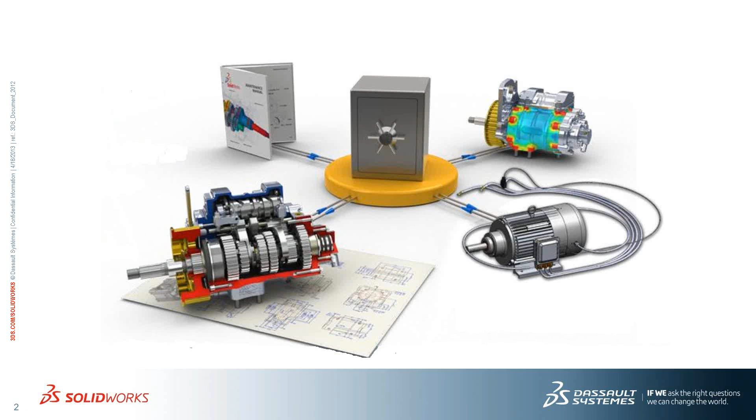So as with all the other products that SolidWorks provides, it's kind of all in that grouping, from simulation to composer to the design tool. Electrical fits right in there. And when I say it fits right in there, it will work right inside of SolidWorks. We can manage the data inside of Enterprise PDM, so it's one of those pieces we can plug in and work directly with, just like all the other SolidWorks tools.

Now, what I want to cover today, I'm going to keep it light on the PowerPoint, but I do want to set things up as to where the electrical 3D product fits. I'll talk a little bit about the typical electrical mechanical process, issues with that process, maybe a new process proposal, and then we'll look at the products and actually run Electrical 3D and show you what that might look like. So here's what we're seeing today.

Very typical: the 2D electrical user creates the schematics, the line diagrams, the work they need in 2D electrical. The mechanical designer does the layout of the mechanical side of things. Then, as mentioned before, there's some integration meeting or communication that allows you to take the two pieces and put them together, but it happens late in the process. Then you have to document everything for manufacturing. It's a very serial process.

One thing waits on the other, or maybe not. Sometimes mechanical design gets ahead of electrical design, sometimes electrical gets ahead of mechanical. We'll talk about that as we go through this today.

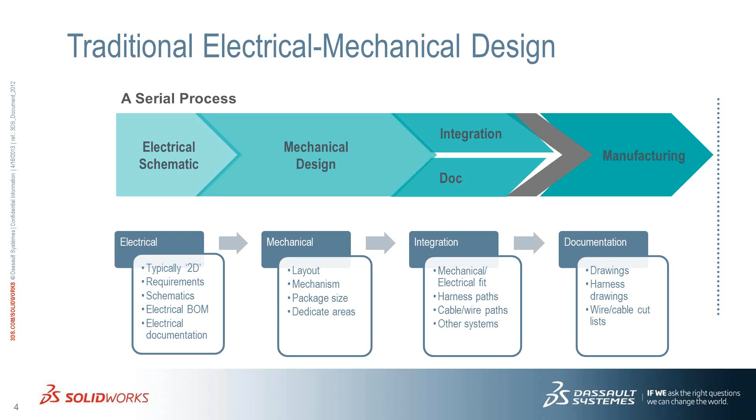Now what are some of the issues with that? First, you have a separate bill of materials typically for mechanical and electrical designs. So if you're looking at full cost estimation of your product, there's more work to work up everything there. When we talk about the design collaboration that exists between the two, it's meetings, it's conversations, it's passing a drawing. There's really no true collaboration currently, unless you've gotten really unique in your process.

The integration of the two systems, as I mentioned in that serial process, is typically an afterthought. You don't plan the paths for routing electrical as efficiently as you wanted to. So sometimes when you start to put equipment together, you have to reroute things or wire it a different way because you don't plan for the electrical side. And it's hard when you've got many phases like electrical, hydraulics, and pneumatics, and the different individuals who work on those, getting them all coordinated together.

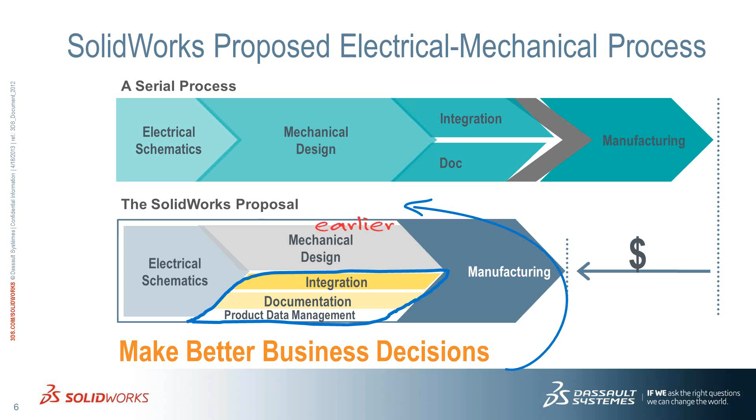So what we're proposing with electrical and electrical 3D is to take that process and start to integrate your electrical design into your mechanical design much earlier in the process. Document it, manage it, and integrate it all in one shot, cutting back the time you need to complete your designs.

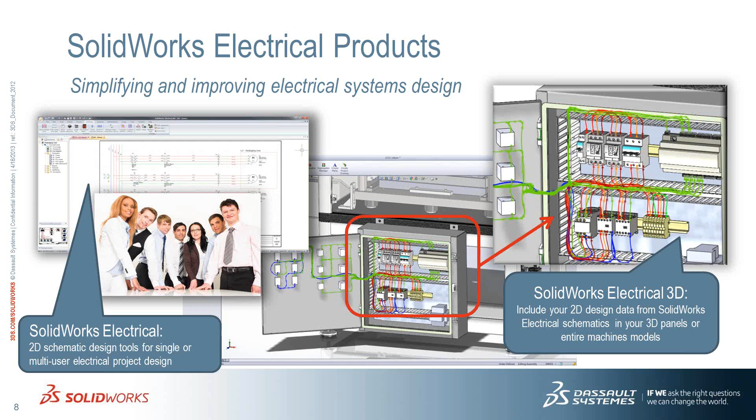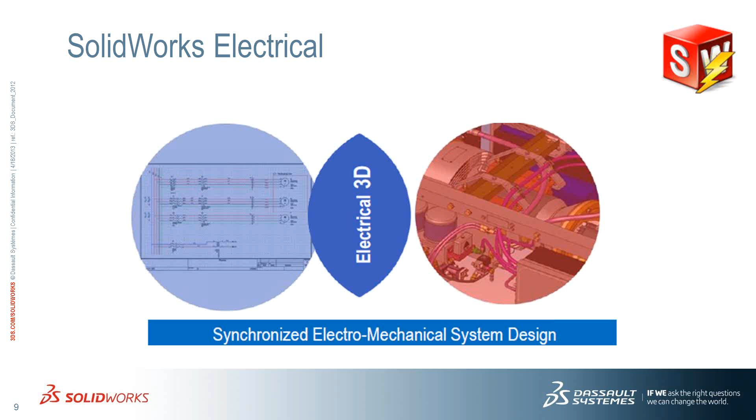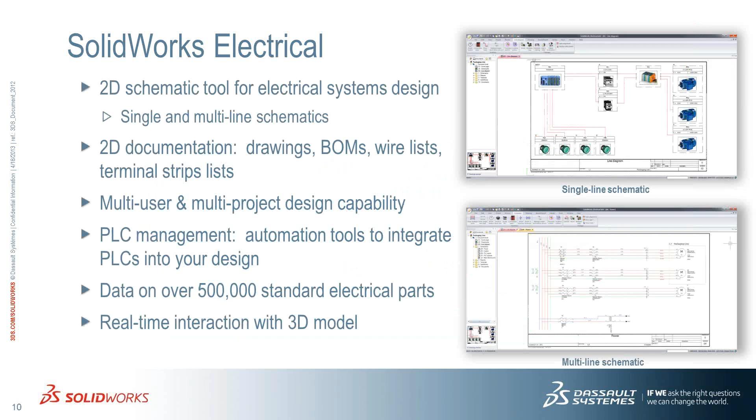So when we deal with electrical products, hopefully you saw this morning the 2D electrical, and we have the 3D electrical product. Now I'm going to focus on 3D electrical. Kind of visualize it this way: it's that piece that bridges the gap between the 2D electrical and the 3D mechanical. It's that synchronized system design. Now, if you didn't attend this morning's SolidWorks Electrical 2D session, that tool is intended for the 2D schematic, line diagrams, panel layouts. With 3D electrical, here's some of the things we can look to get.

First of all, we're going to leverage the schematic that the electrical team has already put a lot of time and effort into. We're going to keep an eye on that electrical design - if things change, if components get added, we're going to know about it. Now we can virtually plan all our paths and routes, and we can avoid issues with other subsystems.

What this helps you to do is create more consistent product assembly documentation and manufacturing later on down the road. You know what the length of the wire is going to be, you know what it's going to look like, and you know where it's going to be routed. Another big aspect is having a unified bill of material, getting those costs associated with understanding the electrical and mechanical components, and then organizing it later on for simulation.

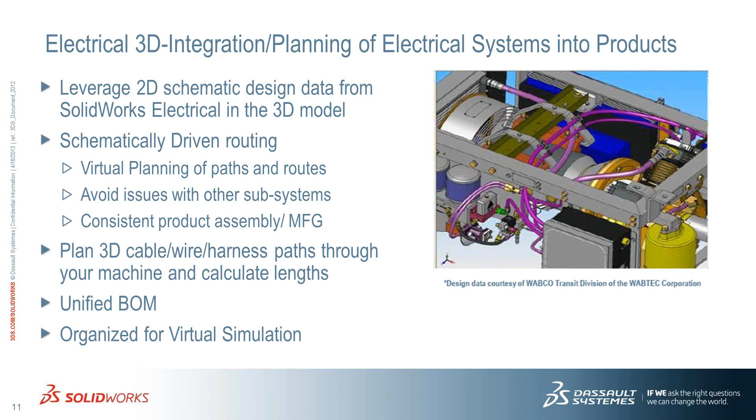Think of the other things you do like flow simulation, mechanical simulation, and understanding what other areas inside the mechanism have wires and harnesses within those. Think of it another way: think of the electrical components that we add to our SolidWorks assemblies. That's what we're focusing on today.

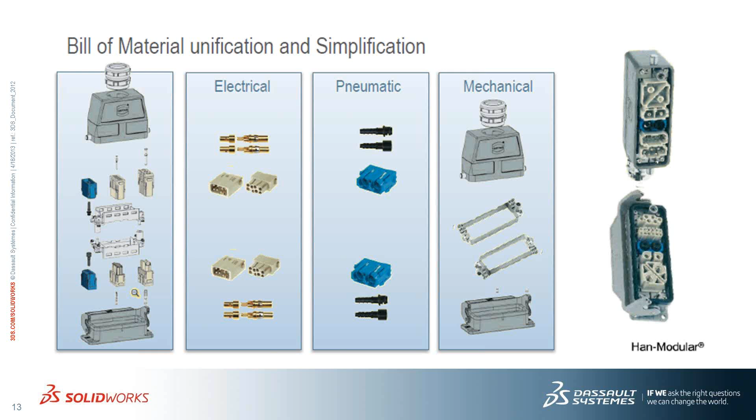When I talk about bill of material unification, this is a good image that helps us understand that. A lot of times today when we're doing mechanical design, we leave out some of the electrical components or we leave out some of the pneumatics. In this case, we allow us to take advantage of what's been done in the 2D to put all of that together into our assembly so we have a full bill of material. Okay, so let's take a look at the product.

Electrical 3D is just one aspect of SolidWorks Electrical. The other is the 2D. The neat thing about this is it's all connected in a collaborative environment.

There's actually a server where the 2D electrical user and the 3D electrical user connect to, so it's real time. On the mechanical side, you're going to start to work with existing projects that your electrical designers have started. Here you can see I have multiple projects available to me, and I can choose to open those projects directly inside of SolidWorks.

SolidWorks Electrical 3D is just another add-on. When you turn it on, you have toolbars, and another tab over on your task pane for the project documents.

What you're seeing is a folder or book layout for an existing electrical project that includes cover pages, drawing lists, and some other things unique to a project, such as adding other PDFs or other documentation that you might need.

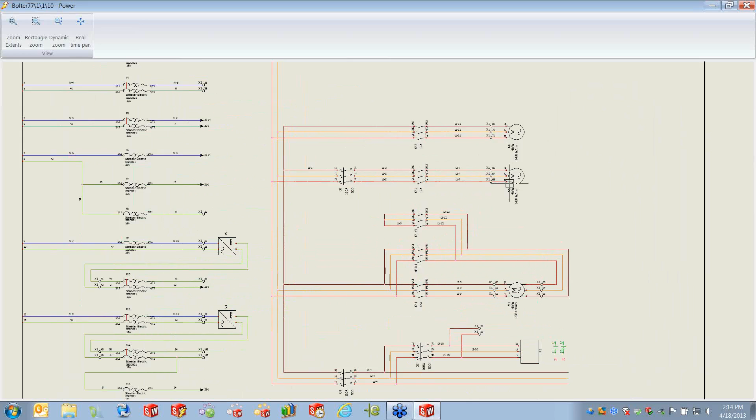What's neat about this is I have the ability as a mechanical designer to go in and look at the 2D electrical design, the most current design. This is really just an image, I can't change it, but I'm able to see the motor starter circuit we're looking at for this particular design, and I have access to that.

Now what you're seeing is just how it was organized. On top of that, we have our SolidWorks files associated with this, because not only are we wiring up a panel, but we're also managing the SolidWorks file associated with that. That's also stored within the project, and I can go ahead and open that automatically from here as well.

A couple things you'll notice now: our CommandManager has electrical 3D options associated with it. Next to my DisplayManager, we have something called the Electrical Manager, which manages all the components as part of the electrical design, and I'm going to come back to that in just a moment.

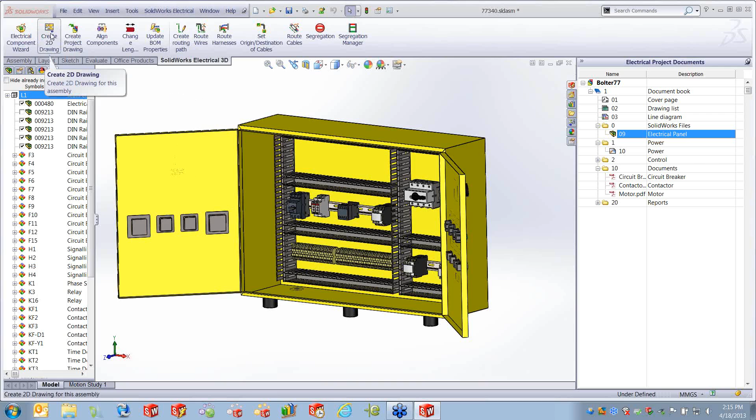As we go through this process, let's look at some of the typical things we do inside SolidWorks. First, we create 2D drawings. I'm going to let the software create a 2D drawing of my unfinished panel. This panel's been started using the schematic tools that are available. We'll go ahead and start our SolidWorks drawing.

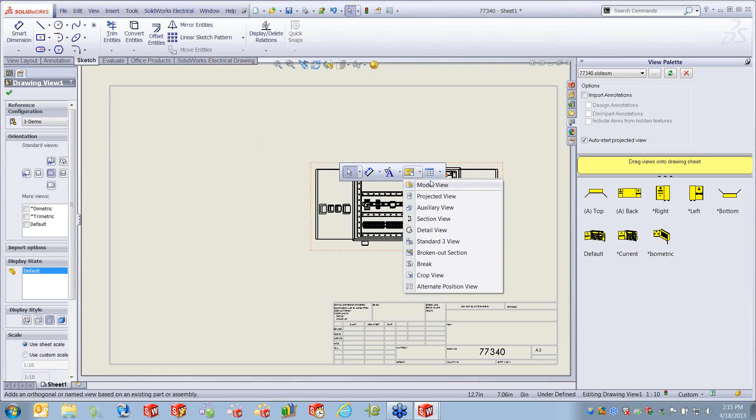This is stuff that we're all used to at this point. We'll go ahead and maybe add a bill of materials to this, and we'll balloon it because we want to see the process of getting this up to date. We'll go ahead and auto balloon, and everything's coming in just nicely.

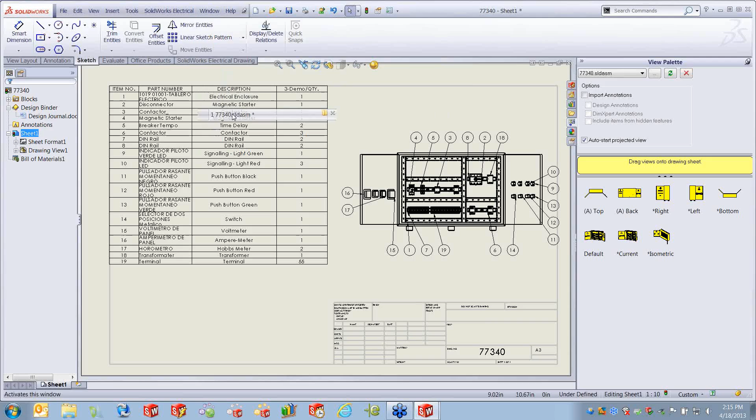Now, as I go back to the assembly and continue my design work, when we talk about collaboration, we really have to understand what's been done since our last change or last edit to this assembly.

In order to collaborate with the electrical group, we have the Electrical Manager off to the left-hand side. This is a list of all the electrical components that have been added in 2D electrical. If I expand any of these components, you can see the type of component it is and whether it has been added to my SolidWorks assembly. If there's no checkbox, it has not been added.

I also have a nice little tool to hide any components that have already been inserted. You'll notice that I'm missing a DIN rail here. I can tell the software I'm ready to insert that horizontal DIN rail, and place it into my assembly. It automatically brings up some of the mating tools we have in SolidWorks, but here's where it starts to get unique to an electrical experience.

I have the ability to modify the length of that rail on the fly. If I wanted to make it a little shorter or longer, I could do that automatically. Now there's a couple other components we need to add here. I need this magnetic starter.

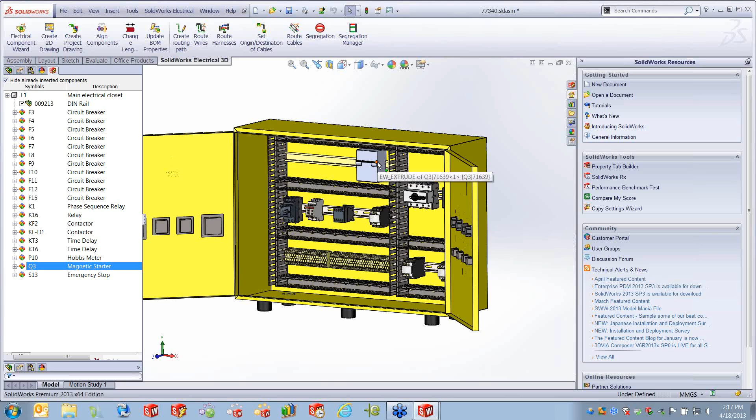In some cases the software, as it did with the DIN rail, knows exactly which component to get out of my library. We're going to talk about later how we might affect that. As I right-click on a component that hasn't been added, I can drop that into my assembly. The one thing I want you to notice is that the component automatically snapped itself to the DIN rail.

Okay? So here's the process of us taking a look and seeing what the 2D electrical designer has already done and adding those components to my electrical assembly.

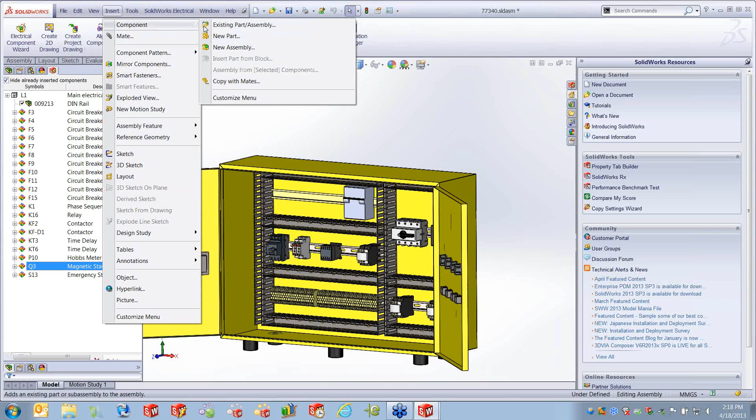But that's not always how it works. Sometimes your mechanical group gets ahead of the electrical group. In other words, you'll add motors, you'll add light curtains, you'll add switches, you'll add things to your assembly that have yet to be wired within the system. Well, that's very easy. I can go ahead and insert components like I typically do. We can browse to what we want to add.

In this case, we're going to add an emergency switch. We place it into the assembly the same way we do any other component in SolidWorks. There's nothing new there. I can go ahead and position that component within the assembly and orient it properly.

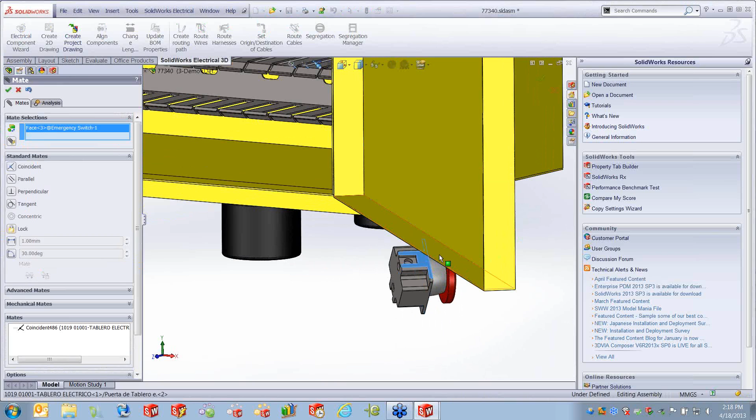Once I have it oriented, this is where the communication process comes into play, because I have yet to let the electrical group know that I've added a new component that needs to be wired up. So what I can do on the mechanical side, very simply, is to add that component. Now, adding a component is your way of communicating back with the electrical group.

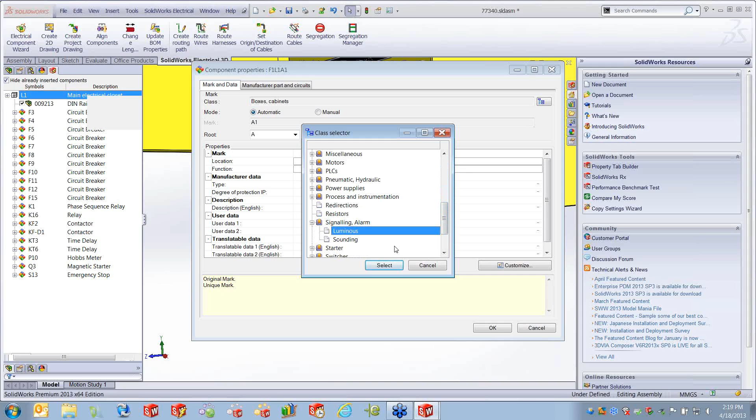Within electrical, we have a library of components. Those components contain some of the 2D electrical symbols that will be used for the 2D users, but it also contains some tools and items that we can utilize on the 3D side. Everything is organized by class, so I can go ahead in this case and select the class of component that I want to add. This is a signaling alarm, a luminous signaling alarm. I can go ahead and select that.

If I happen to know the next mark that we're going to use, I can put this in here, but this is something that can be edited on the other end. And we can also put in things like descriptions, so we can make sure on the other end they can have an idea of what we're dealing with or what we've added.

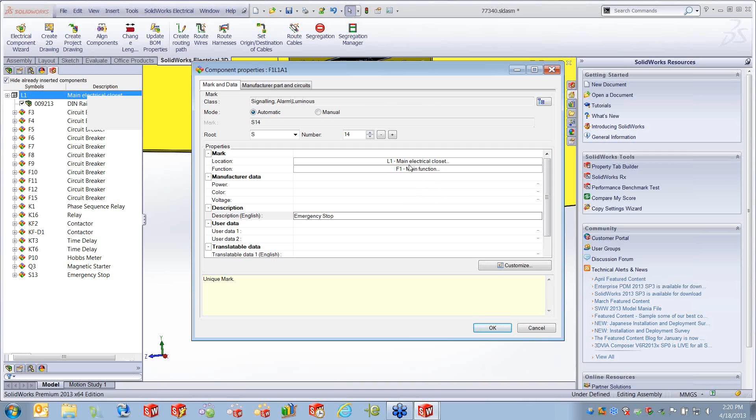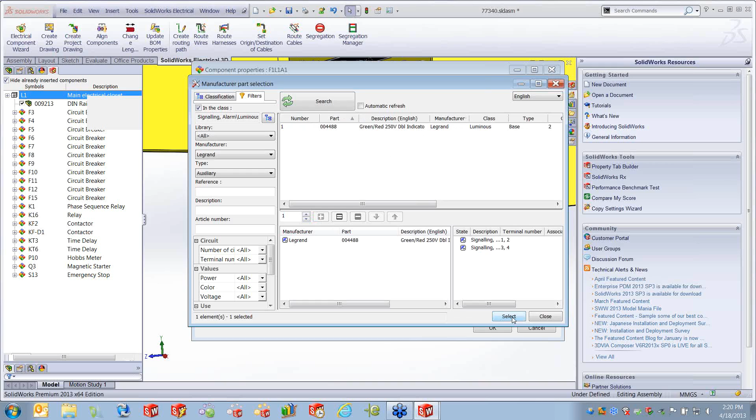Now, on top of that, we can also tie in an actual manufacturer of the part that we're going to add in this case. So we have the ability to search an existing database for different manufacturers of these types of components. If I happen to know the reference number, I could go ahead and type that in and physically search the database, and here I have an emergency stop indicator from Legrand that I can go ahead and add to the system as well. Okay, and this just tells the electrical designer what we're actually using as a manufacturer, so they can do any research that they need to do along the way.

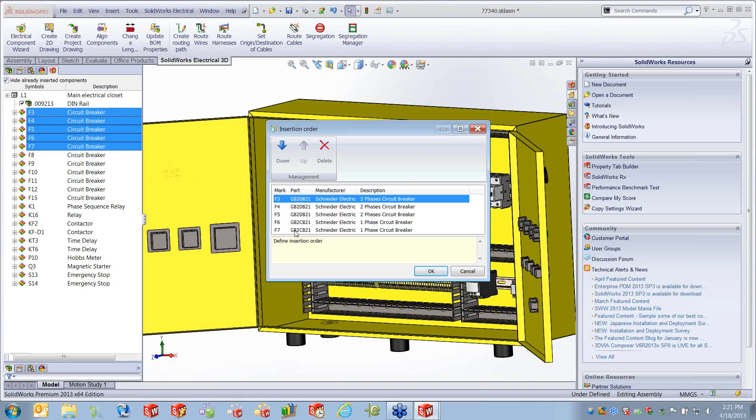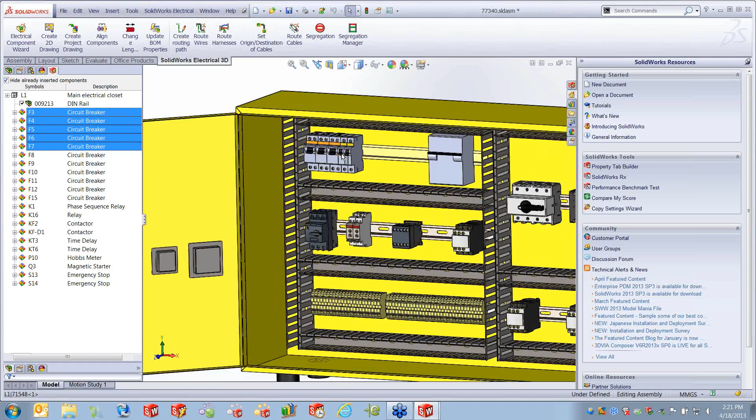Now, I have some other components that I need to add to the rail here. One nice thing is I can go ahead and select multiple components and insert them. I can also change the order in which I want to insert them, and just like the components that you saw before, they'll snap to the DIN rail, and I'm going to show you a little bit later how that gets done. When you're placing multiple components, I can even set the spacing. So as I set the spacing to 0 here, you can see that it's spaced the circuit breakers directly next to each other.

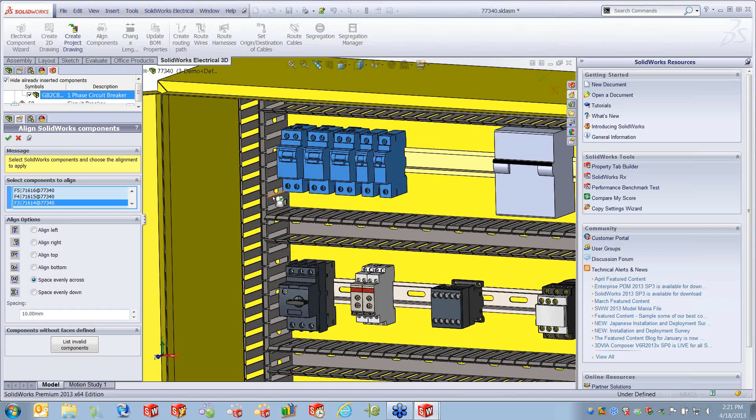But at any point in time, I can come back in here, and using a tool inside of Electrical 3D, I can go ahead and respace components because of heat requirements and so on. So I can go ahead and respace that. Now, I've done all this work like we typically would in SolidWorks, and I have an existing drawing. If I jump back to that drawing, you'll notice that the new items are automatically added to my bill of materials.

I may have to come in here and add a few balloons within that, so we'll go ahead and balloon a couple of the items here, and I can use my spacing and everything else that we have available to us.

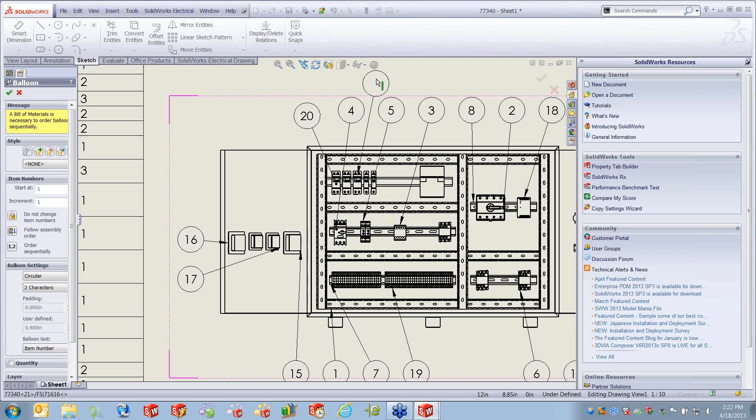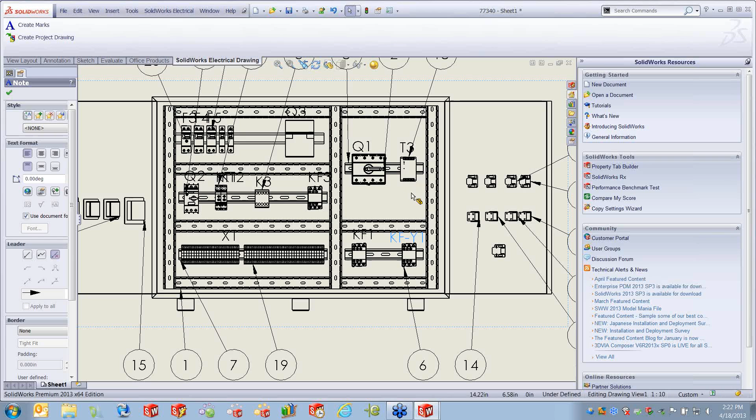Another thing that we have available on the drawing side of things is the ability to grab the mark data. I can go ahead and create marks within the system so that it grabs the component names and the marks associated with that, and it places them on the drawing. And again, I can control the fonts and so on.

Now, when you think about collaboration between the mechanical and electrical, this is a mechanical drawing, but we may want to communicate it with the electrical team. And the electrical team is working within this electrical project that we have here.

So what if we could take any view, any drawing inside of SolidWorks and actually create it as a project drawing? Well, I can go ahead and take this physical drawing and create it as a project drawing inside of electrical, and now when they're in the 2D electrical tool, they'll have access to this same drawing as a static image that you would expect to see.

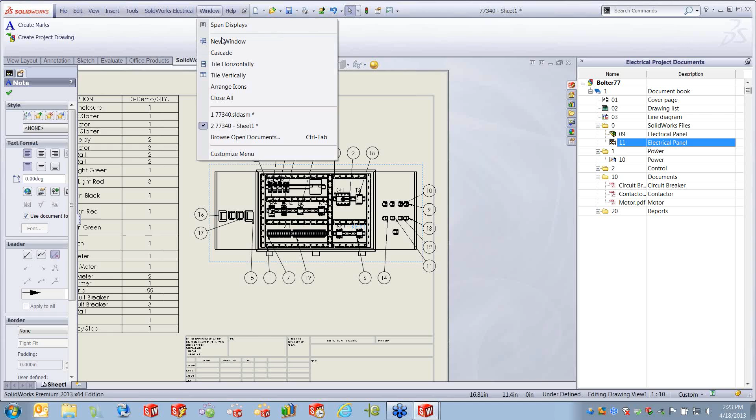Okay. Now, back to our assembly. One of the reasons we talked about having 3D integration was the ability to get your routing and your paths of your wires and cables set correctly before you ever finalize your design.

Now, some other things that we have at our disposal to help us with this, we have a tool called the Segregation Manager. What this does is it helps me to determine if I want certain wire types to go through certain channels within my design. Okay, in this case, I can run high power to one side, all the low power to another side. A way of doing what the manufacturing group would typically do on the shop floor, so you route things correctly along the way.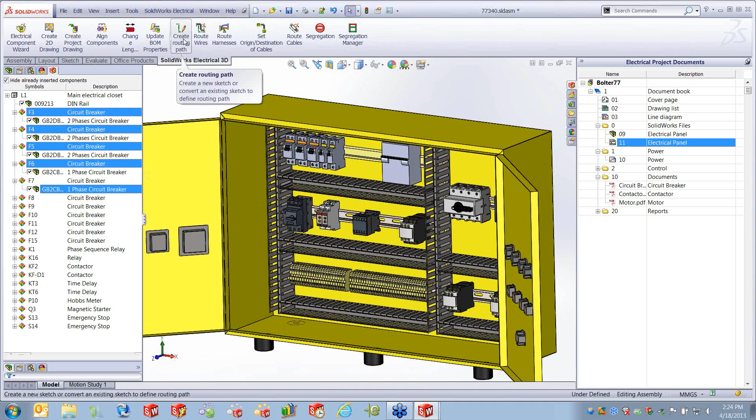Another thing that we have is what we call a routing path. We create a sketch as a guideline to the system to say where I would like to route my wires. When I do those things, I'm able to come in here. I'm going to select a few components in this case, and I'm going to be able to tell the software to go ahead and route wires.

Now, routing these wires uses and takes advantage of SolidWorks Routing. If you've used that in the past, it's the tool that allows you to create pipe and tube and electrical harnesses. Now, this takes advantage of that.

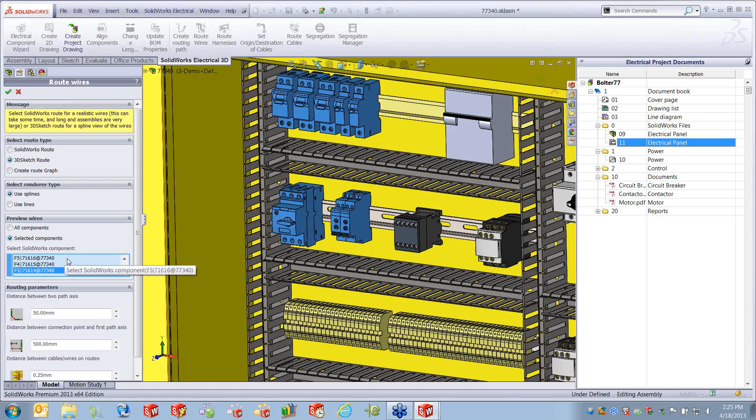We can now create 3D sketches for all the components I've selected, and the software is now physically going to use the routing sketch to run the wires through the channels and make the proper connections to the components within the system. Now think about that. Now you have wires that run from the connection points on all the components through the proper channels to the proper location.

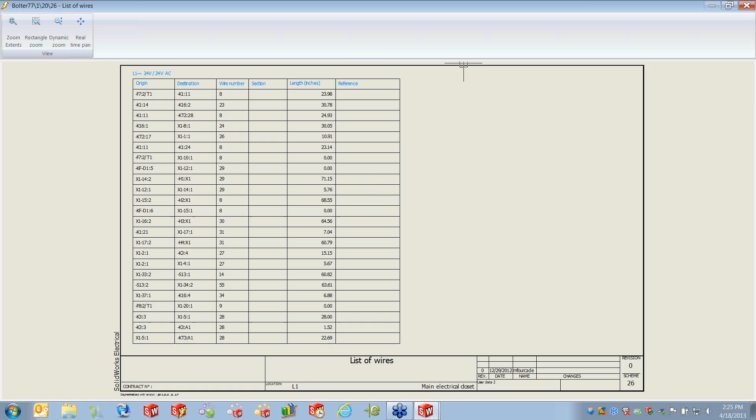Now what I can get out of that, if I go back to my project for a moment, we have our bill of material and our wire lists. When I go to my wire lists, it automatically gives me the length information for each of the wires. So when you think about waste, when you think about purchasing and getting the proper amounts of wires, you have some more resources to assist in making that a reality.

Now I want to talk a little bit about how we make this automation happen, just real briefly. One of the things that we're able to do, as you saw when I drag and drop a component in, it snaps to the rail. Well, how do I make that happen? Well, the first thing that we do is we find the component that we're looking for. In this case, let's say this magnetic starter component.

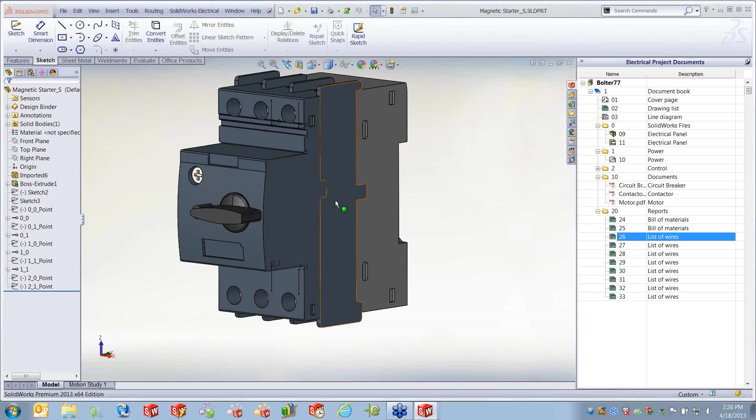And with SolidWorks Electrical, we have what we call the Electrical Component Wizard. It makes it real easy to find something out on the website and download it, put it in your Enterprise PDM to be managed as a library, and now we can make it an intelligent electrical component.

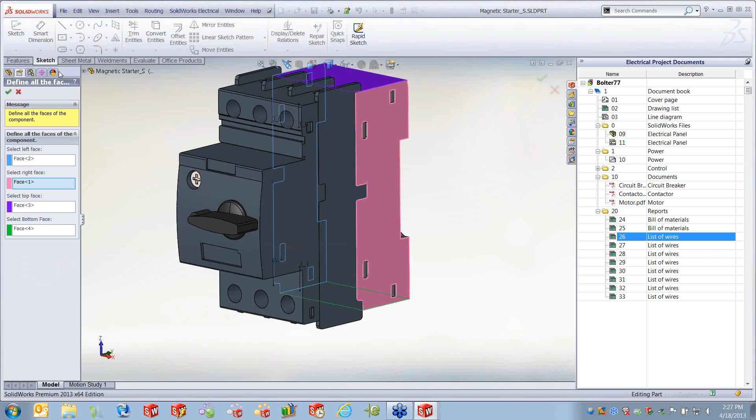Now, a couple things that we give it to help with spacing, to help with routing of the wires. The first one is defining the left, top, right, and bottom faces. This is all for spacing. So we're basically giving the four outer faces on the component. And this is a wizard, so as I provide that information, it kind of walks to the next thing.

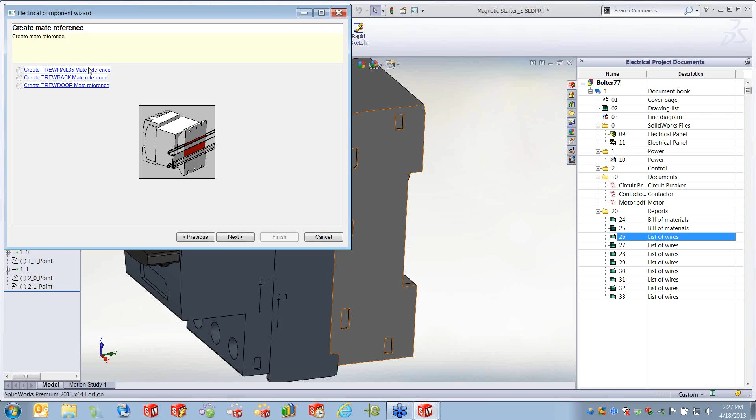Now, for those of you using SolidWorks, you're familiar with mate references. Well, we use mate references to snap to the rail, yet Electrical Component Wizard helps me to create those mate references. So all I have to do is give the software where the top face of the rail is going to be and the front face. So it's going to connect the two together when I drag and drop them on.

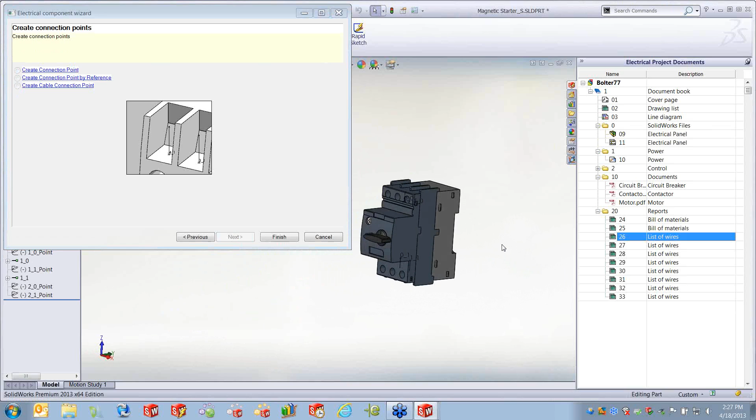Now, the last and most critical piece of this has to do with the actual connections. When your 2D electrical user creates a schematic, they look at the different circuits relative to a component. And those circuits correspond with connection points on my 3D model. So if I wanted to create a connection point in this case, what I would need to do is create a sketch that contains a point. Okay, I'll go ahead and show this.

So I select the point that the connection is going to come into, specify the circuit number and the connection point, and it goes ahead and creates the connection for me. Now this number is what gets called out by the 2D guy so that it knows exactly where that wire needs to come in. Okay, and I can go ahead and do this for the two missing connections that we have.

Okay, once you have this done, that's all we need for the wizard for an electrical component, and this thing is ready to be used in Electrical 3D. So it's very easy to either create your own component or download to do that.

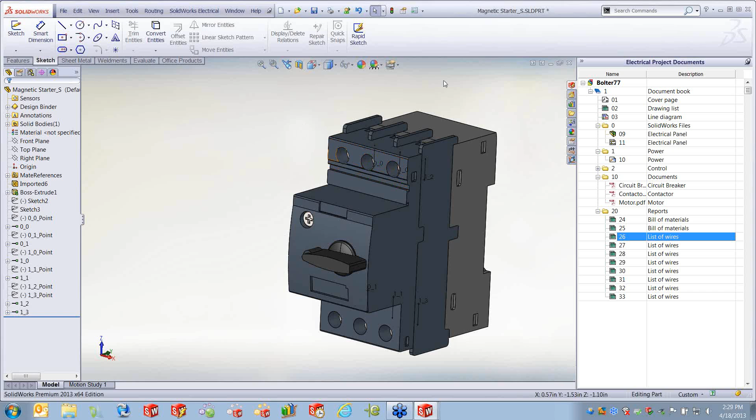Now, another aspect that I wanted to talk about, just to clarify my presentation today, we also have that whole idea of manufacturer parts. When you saw me pick the Legrand part number here, this all comes from a parts manager database with all those classes of components that we're dealing with here. So how do I add something in there?

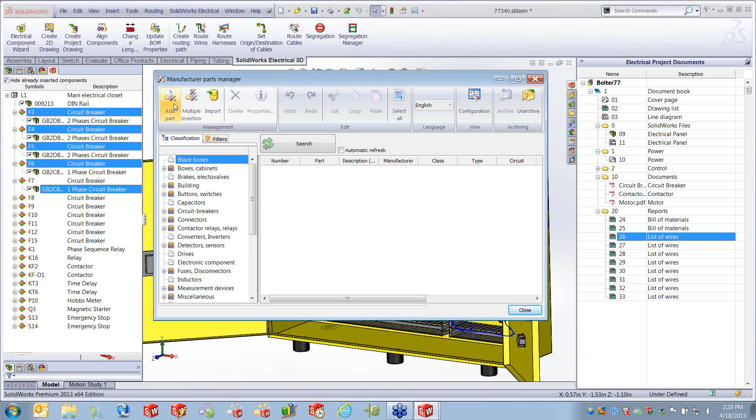If I'm a mechanical guy and I now get a new motor that we don't have in the database, I got a new 3D model, the electrical guy doesn't know anything about it yet because it's something new. So how do I go ahead and add that to the system from the 3D world? Well, I can go ahead and use my add part command, and I can specify what the part is. And this happens to be a Haydon Kerk stepper motor, so we'll go ahead and give it some part number or identifying information. This is a Haydon 20,000 captive stepper motor that we're dealing with here.

Now, there's some other information that we can put in here down to the bottom, let me get down here a little bit. All right. Oh, it's looking for the manufacturer first. If you don't have the manufacturer, you just type it in, it's a Haydon Kerk. What class is it? We'll put it in the motor class in this case. Okay, and I can put in voltage, frequency, some control information.

But here's the important part for the mechanical team, is I now can associate a 3D part from my library, the part that I set up. So I can select in here, go to the part that I'm using in my library, and tell the software, okay, here's my stepper motor. Now, that's what creates that relationship when I add the component in 2D, that it automatically knows what to add, like the DIN rail and the magnetic starter that we added before.

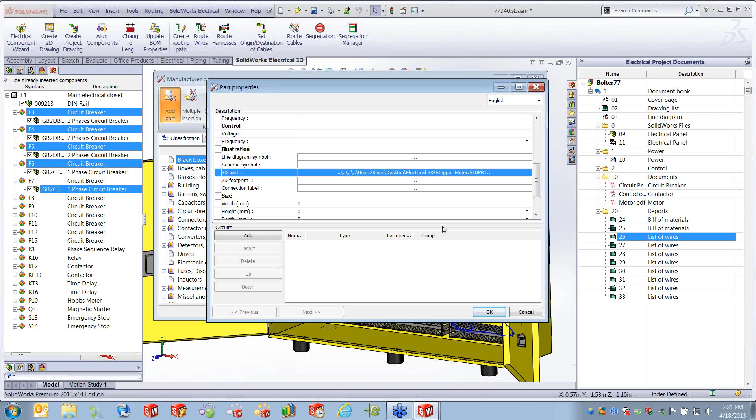So I hope you liked the presentation today. I wanted to focus on the 3D side of things, how we interact with the 2D users, the 2D electrical schematic design. I understand this is kind of something new. You don't really have these types of tools elsewhere, but hopefully this can create a more collaborative environment so you can utilize the 2D electrical users' work to integrate directly into 3D.